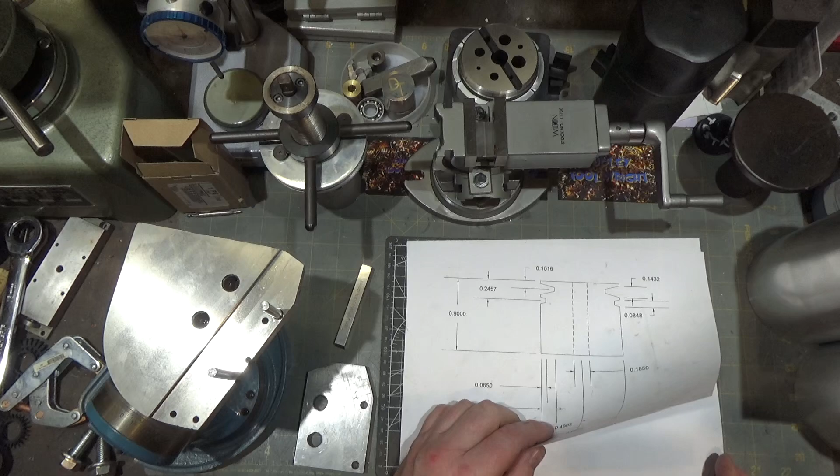So this time around I have some other parts. I got to make another part. He wants 5 of them for another customer. This is a blown up drawing and it's made out of Delrin. Everything's really simple except these 30-degree grooves. Walls have to be fairly accurate. And I'm not sure exactly how this fits, but it's part of a record player.

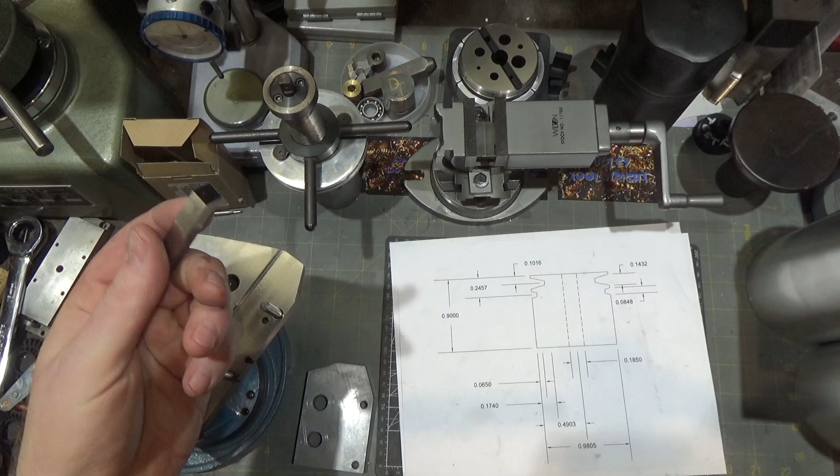This is a scale drawing, so this is a 1-to-1 drawing of the parts, so they're fairly small. But these grooves are fairly deep and fairly close together. 30-degree walls. So what I'm going to do is grind a 30-degree tool. I've got some high-speed steel here, and I have not got a ton of experience grinding bits, and I'm not going to try and freehand this.

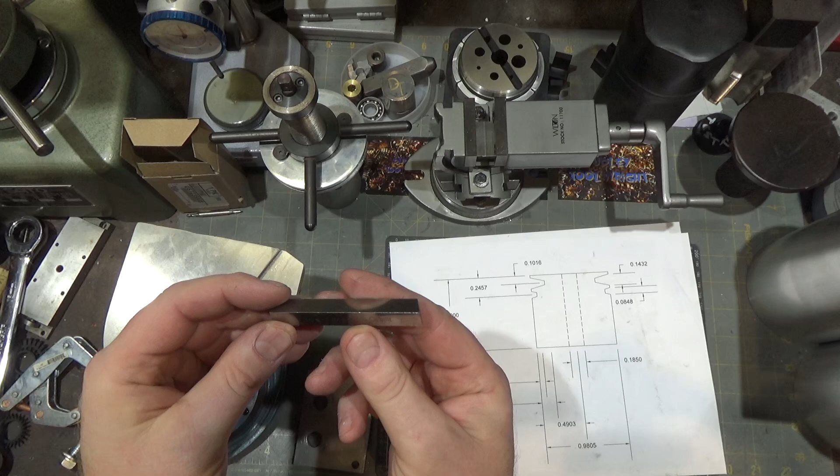Now the nice part is that this bit's already got a slope on the front here that slopes back away from a point, so that saves me one of my grind angles. So let me just give my 2 cents for someone who's very inexperienced about grinding tools. But the general theory is that if you were just going to cut on, say, this far edge over here, you want the tool to fall away in every single direction from that point.

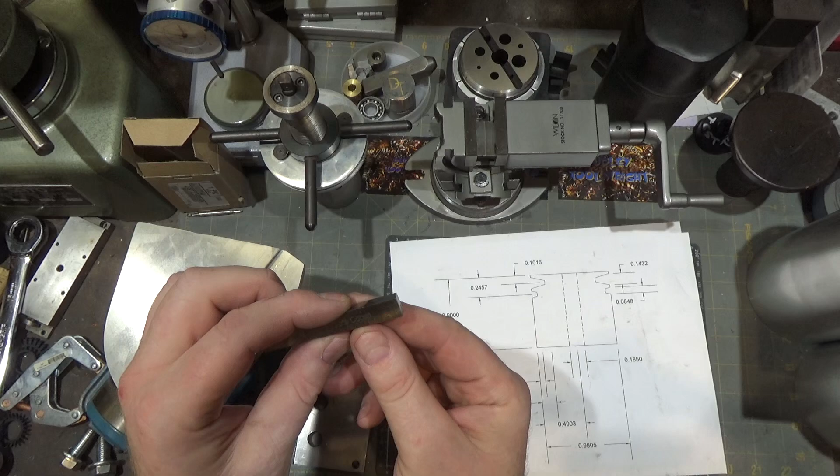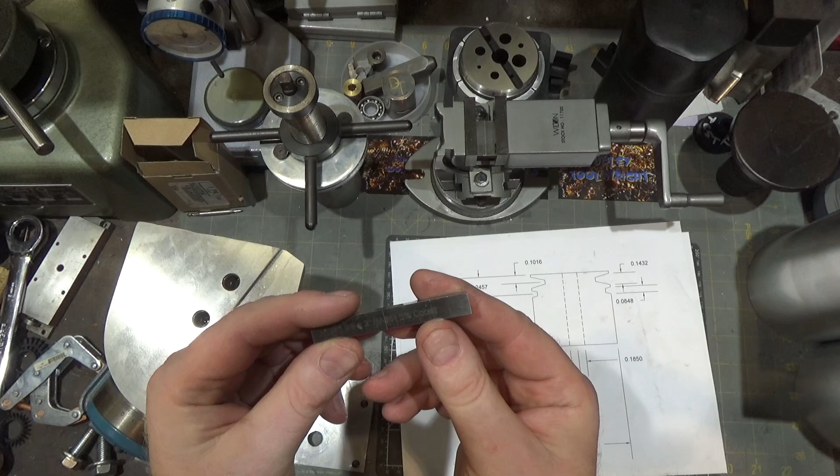Means you want this plane here to slope back. You'd want the top to slope down. You'd want this to slope away back to the side. You'd want this to slope down the way it is right now, and you'd want this corner to slope back like this. You know, this angle. Basically, you want the tool to fall away from the edge at every possible angle. And that would be a normal approach.

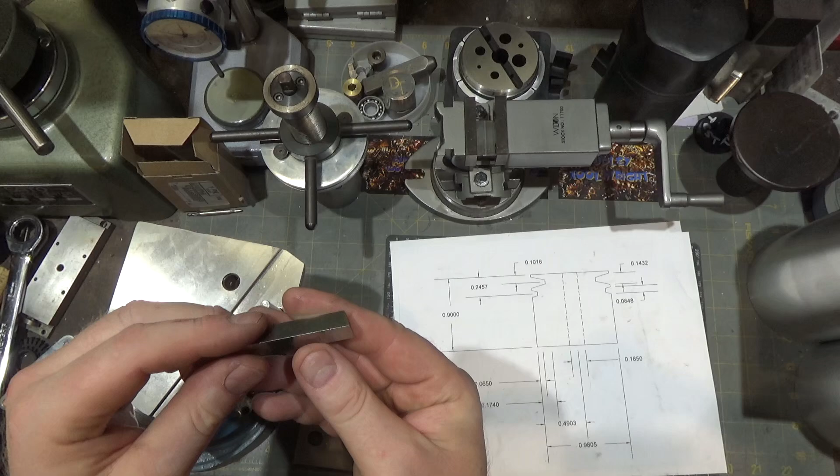However, this tool is going to be a 30-degree cutting tool, and so what I'm going to do is I am going to use this angle as relief on that direction, and I am going to grind this side down 30 degrees, this side down 30 degrees, and then I'm going to take the top and put a relief this way on it so that the chips have somewhere to curl. We'll see how successful I am.

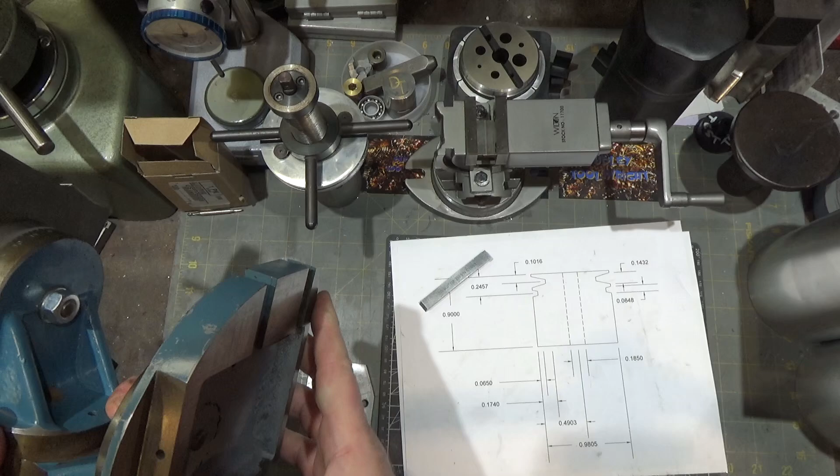I got this guy on eBay, and when I got it, this was all painted, and I took it to my surface grinder and ground 2 sides square to each other so that I have a reference point, and I set this at 90 right off the bat so that I'd have somewhere to go from. And then I surface ground the top. These holes were all in here except for these 2 pins. I don't know, there's some sort of weird thing that went on here.

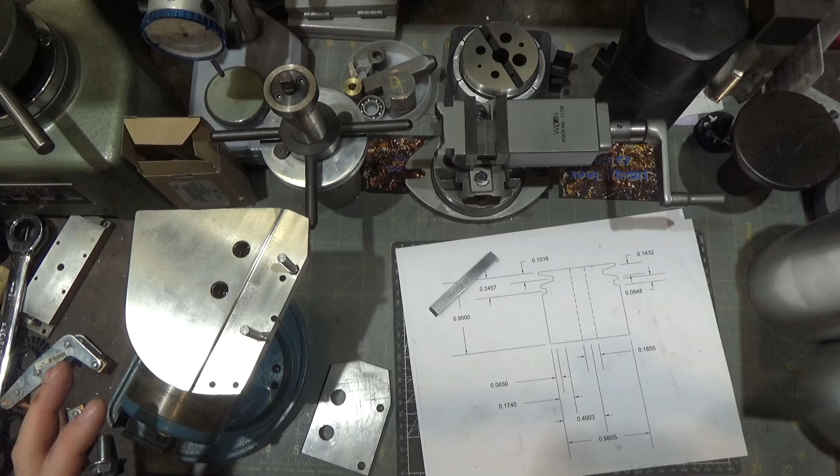And interestingly enough, when this thing's all set to 0 with everything set to 0, this was at quite an angle on here. So some sort of specialized thing. So I squared this up again, first with the mill and then on the surface grinder. So this is all nice and square. Parallel, this is parallel to these 2 edges here, so when I set up my surface grinder to grind this tool, it should be good.

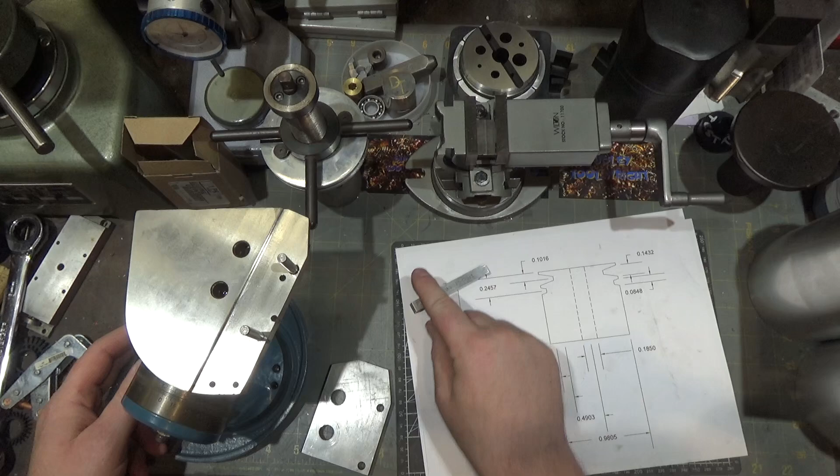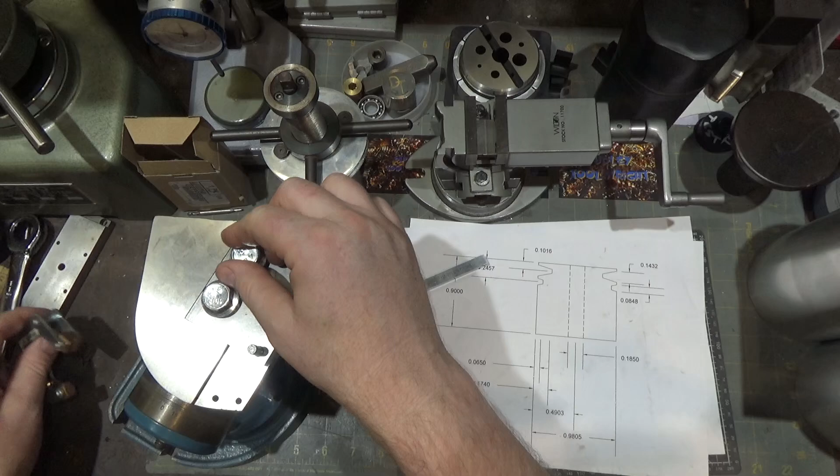I added these 2 pins because I don't really have a fixture to hold anything down here, and this goes down, slides down. This was to prevent it from tilting too much. It doesn't completely prevent it, but it does an okay job. So 2 bolts go in here, and you tighten them down. So in the meantime, I'm taking a Kant-Twist to tighten this side down at the same time.

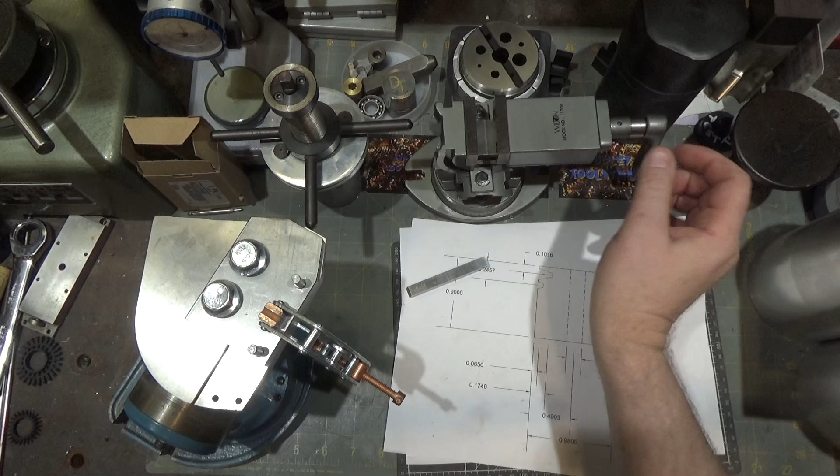I know you'll see in the background here this Wilton vise. This is a multi-angle Wilton vise that I just got. I still need to build a base plate for it, and I didn't think I'd have it in time to do this. So the quality is okay, not great, certainly not equivalent to what you expect when you pay the Wilton price. Although this wasn't terribly expensive, but it's a really small vise.

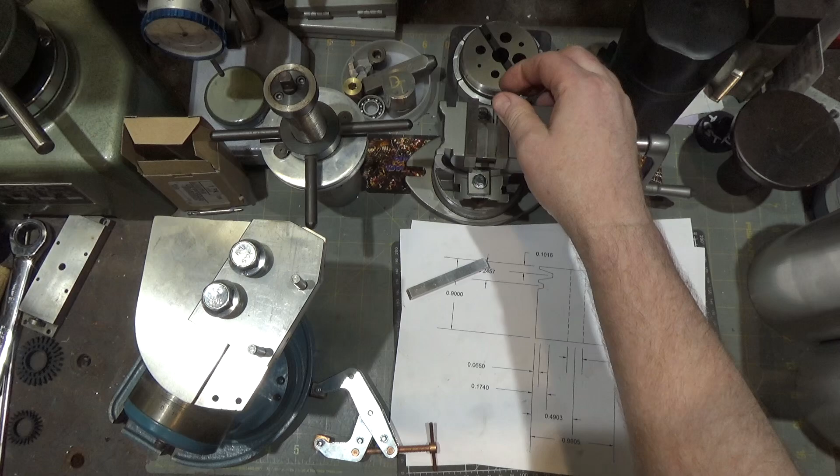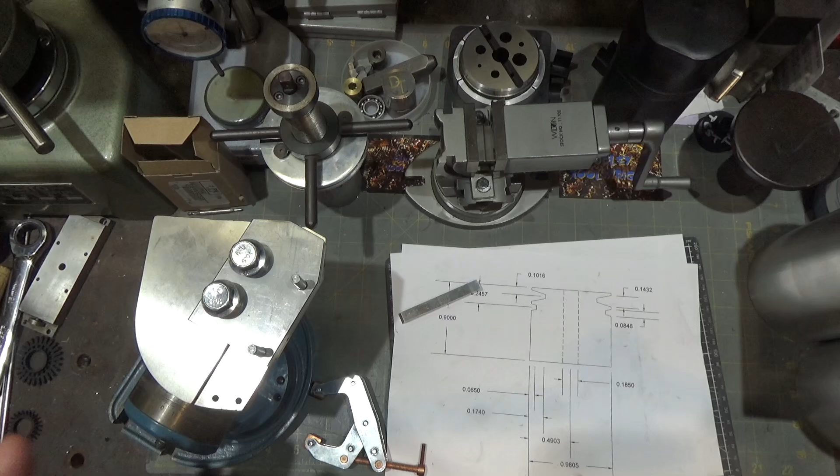These are 2-inch jaws, but they didn't even bother deburring where they ground these edges here, which is really strange. You expect more out of Wilton because, again, they're supposedly the big name, you pay the high price for them. So a little disappointed in that. The action of the jaws is smooth, so I'll use this maybe for the next tool bit I grind. But in the meantime, we're going to take this guy over to the surface grinder and grind this bit.

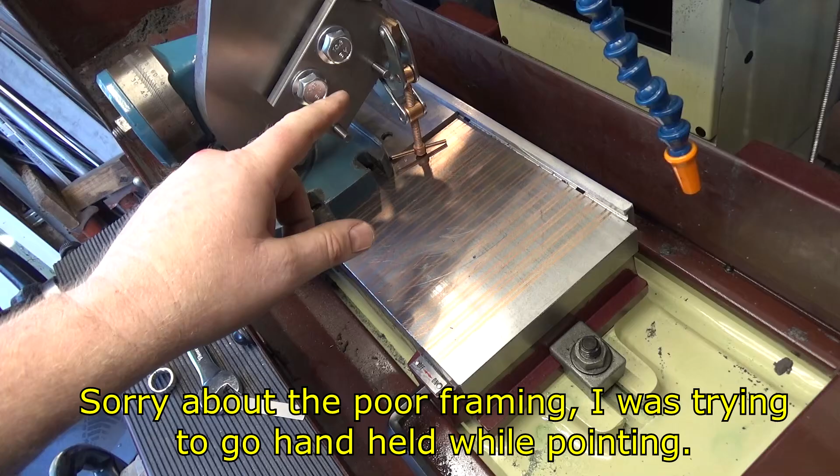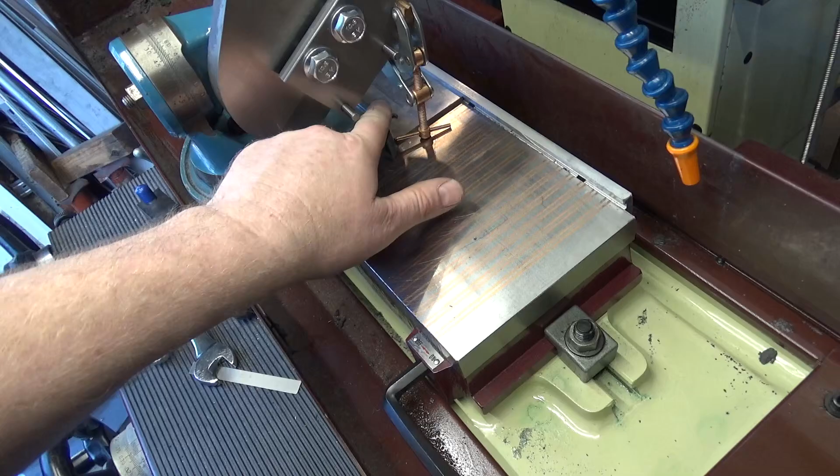Alrighty, so here we are with the surface grinder, and I've got myself set up here. And this clamp is just to make sure that this piece is held in here nice and tight because these 2 tend to cant this a little bit. I've got 2 parallels off the back fence that's square to the table, and then I've got the reference surface on the front of the vise. This guy is set to 0 degrees over here.

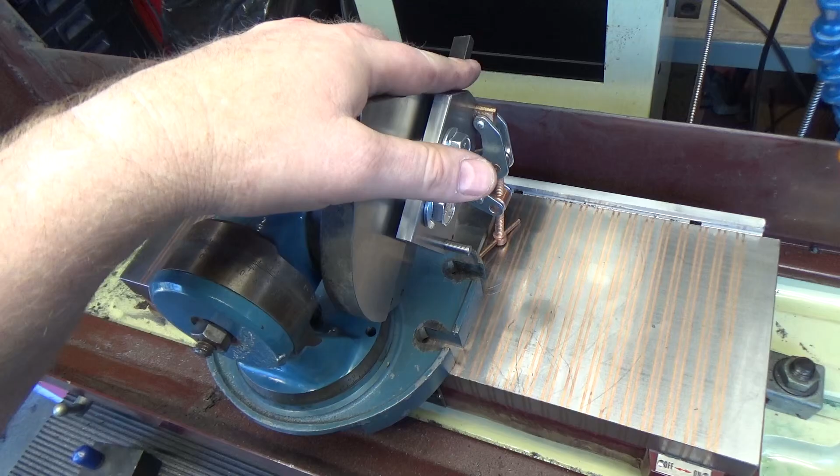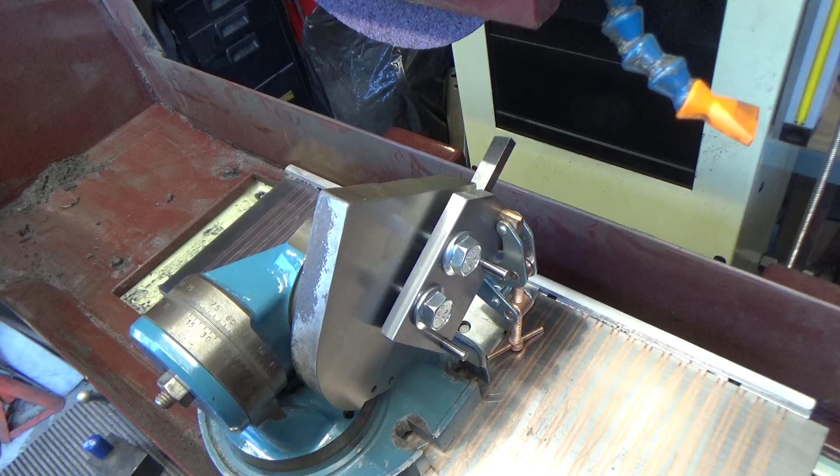Now I've got this one set to 30 degrees, which is going to give me my 30-degree taper there. And then I also have it tilted slightly this way by about 5 degrees to give me some relief along the side so that it falls away from the cutting point. So we're just going to take some material off and see how we do. Alright, so we're just touching off here.

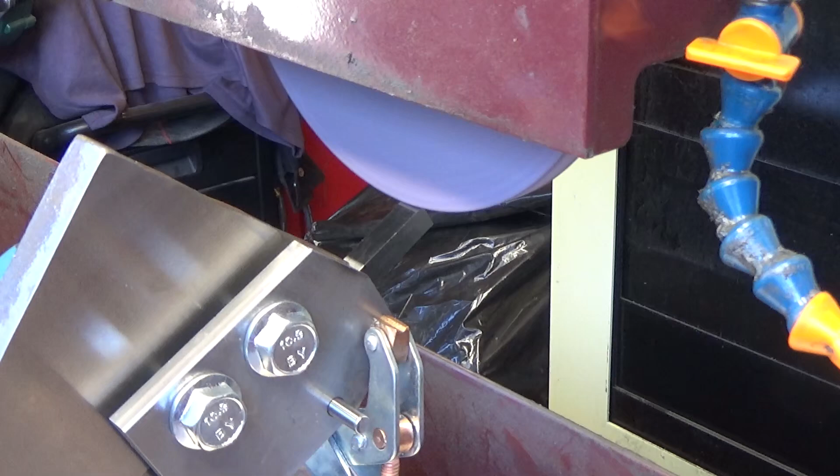Oops. This new camera holder I've got is going to work out, but we'll see. I hope you can hear me. This is a cobalt bit, so I'm going to wear a mask because you don't want to breathe cobalt.

Probably would have been easier to take off the majority of material on the normal grinder and then come over here and finish it off. But I wanted to try this out.

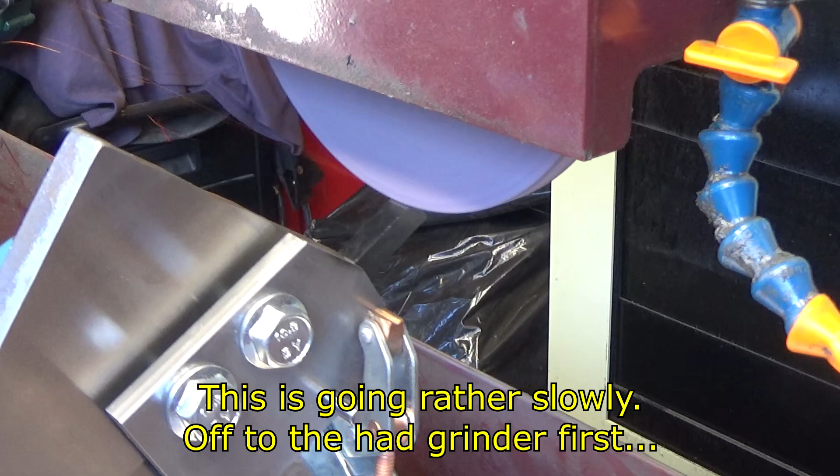I went back and took most of the material off at the grinder, and then I realized I had done 30 degrees, but what I really needed was 15 degrees. I need half angle. So I got to take 15 degrees on each side. So that'll leave me a final angle of 30 degrees. So I took off most of the material. By hand.

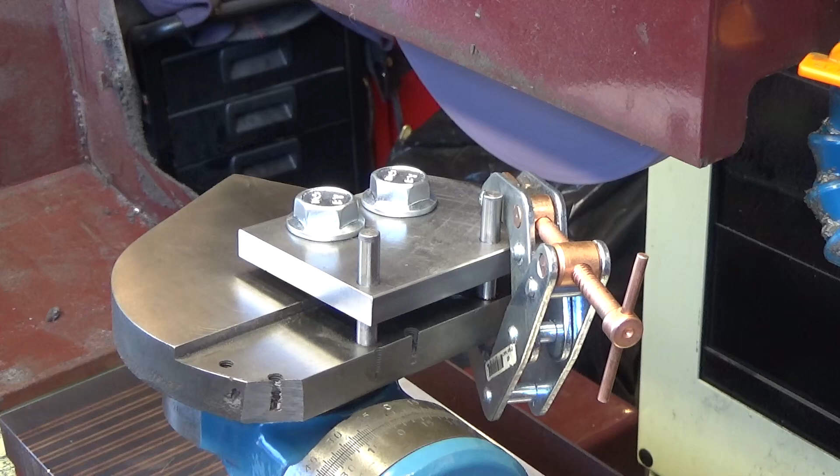I don't think you can see this when we pull this out a little bit. So we're going to do the back relief on the cutter on the top now. So we're going to touch off a little over ½ inch back, which is where we want to have the cutter start.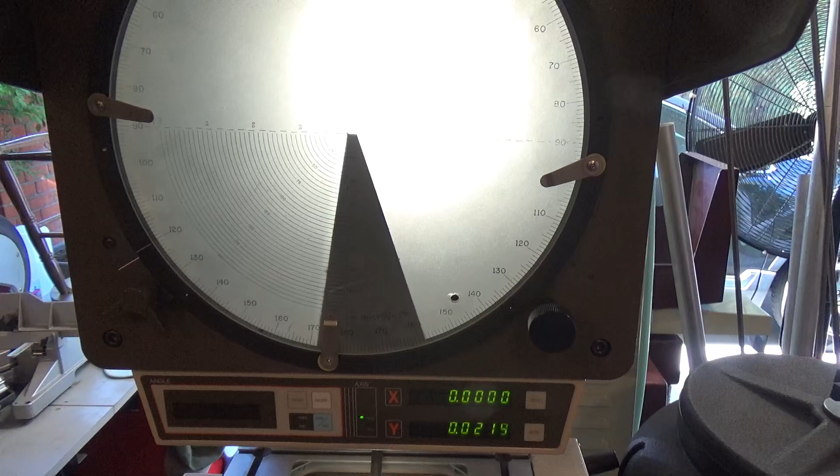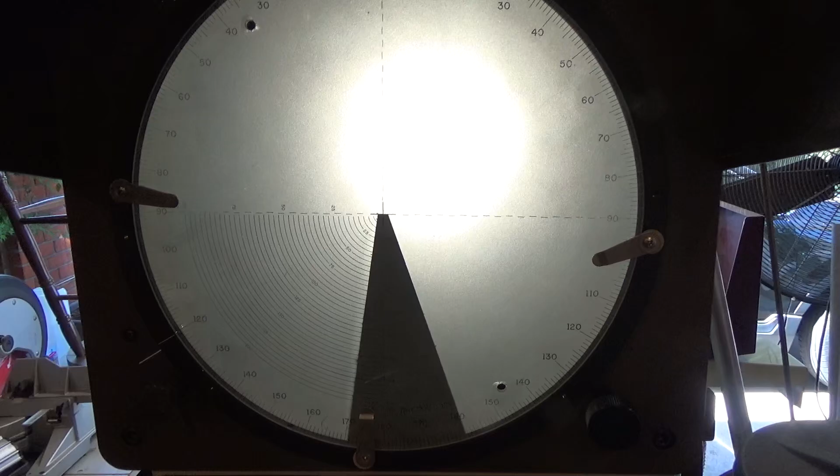Alrighty, so I got my tool bit on the optical comparator, and you can see that I made the end square. I didn't bring it to a perfect point, and I was wondering how wide that is, just to make sure I didn't have to go back and regrind. So if you take one edge and set it over, hit your 0 over here, and then move until the cross is on the other end there, it's about 22 thousandths, 21.5 thousandths across.

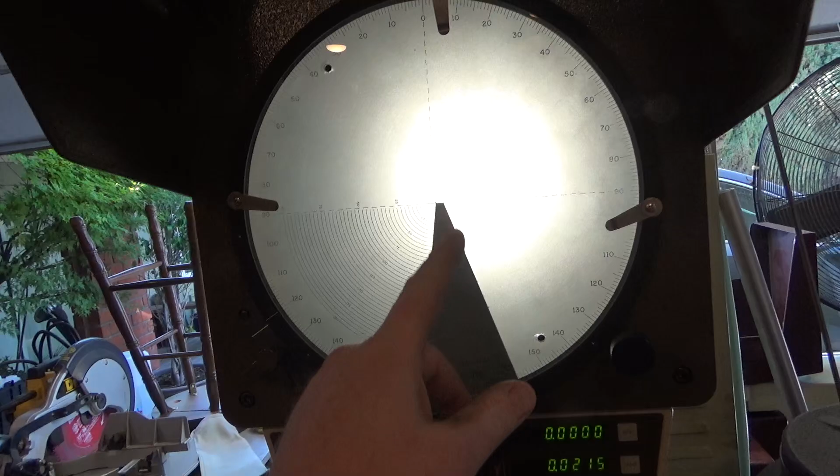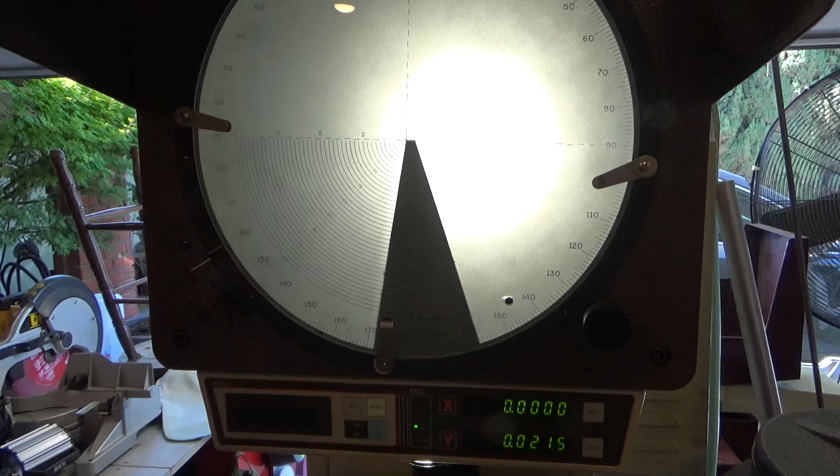And then I'm going to use this to measure the angle. It doesn't have the digital angle measurement option, but I can use the scale on the glass, and when I measured it's 31 degrees. So I think that's close enough for what we're doing here, and we are going to go over and try and make the parts.

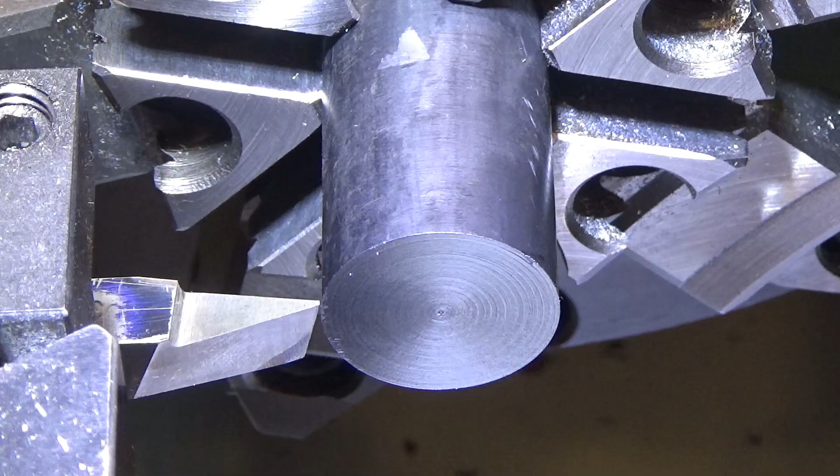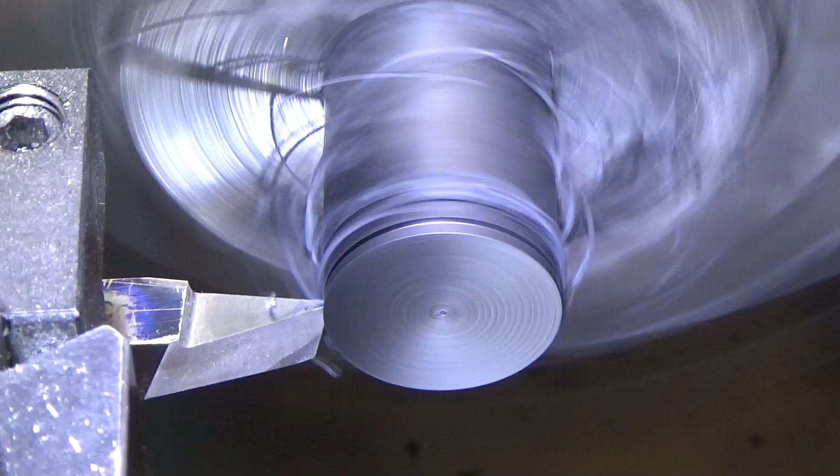So let's do a test cut with the new tool, see how she works. So the farthest we'll have to go in is under 200 thousandths. This is essentially a form tool, so let's see, that's 50 thousandths. That's 120. So far, so good. It's 150. Okay, and then I need to go over 30 thousandths, well, 28 thousandths.

Okay, that worked like a charm. Better than I expected. Second tool I've ever done, but first form tool. And so we got 30 degrees. The side needs to be deburred, but I'm really impressed with how that turned out. Let me part this guy off, and we'll try and actually make the part.

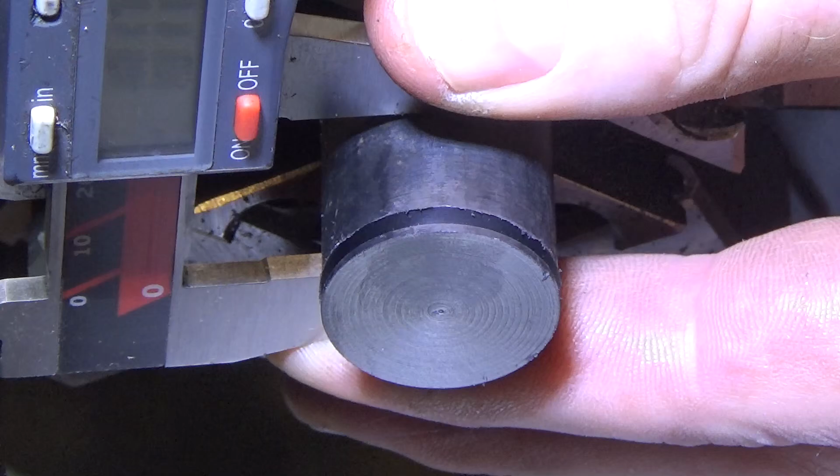The diameter has to be reduced from its current diameter, which should be around an inch. This should be nominally an inch. Let's see. .011, we've got to take it down 30 thousandths. But let me just part this guy off. And this Delrin just cuts like a dream. It's pretty fantastic stuff to work with. We'll just part it off right next to that.

Normally with the parting tool you don't get a great finish. With this material, the parting tool leaves a pretty nice finish. That's what you're looking at there. Even at this speed. That's a pretty nice finish, huh?

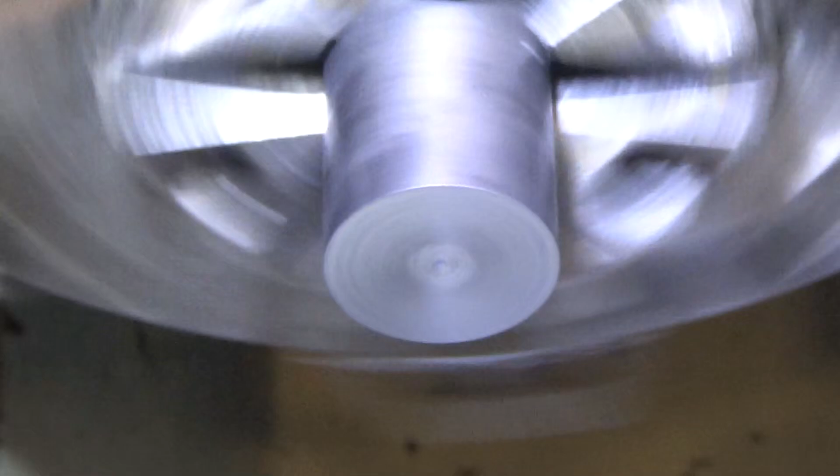All right, so we got to take the diameter down. I'm going to get a mic so we can take a look at that. We're going to take a first pass. We're going to try and leave about 10 thousandths. I do need to slow the feed rate down because that's not the perfect finish we want. So I slowed the feed rate down quite a bit. And we're only taking off 4 thousandths this pass.

This might not be ideal. A lot of times with these inserts, it's better if you take a bigger bite. Small bites sometimes don't work out so great. All right. Finish is decent, not perfect. I have seen better with Delrin. I think bigger bites. This really tiny bite, 4 thousandths of an inch, is not ideal.

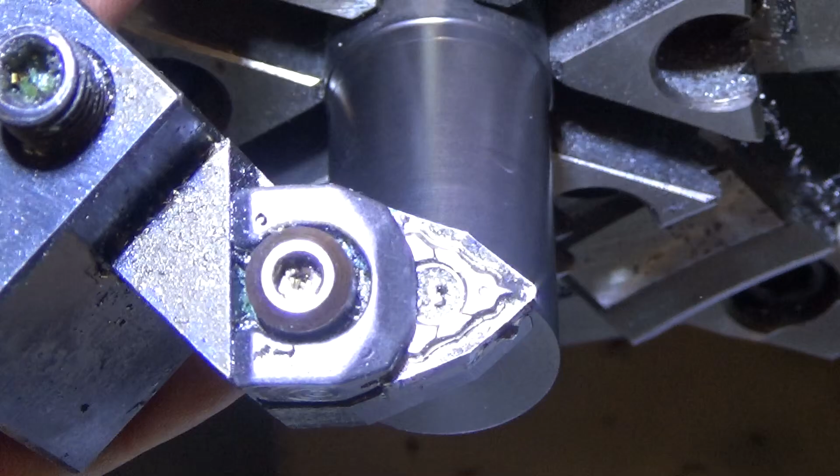Oh, and my insert. I should have rotated to a perfectly clean edge on the insert. The insert's not great either. So these are positive rake inserts. You can see they've got a coating on them to make them very shiny, but you can see the edge where I've been cutting aluminum with it has probably got a little bit of aluminum adhesion, even though the coating's supposed to prevent it. So I could have gotten a better finish if I had flipped the insert around.

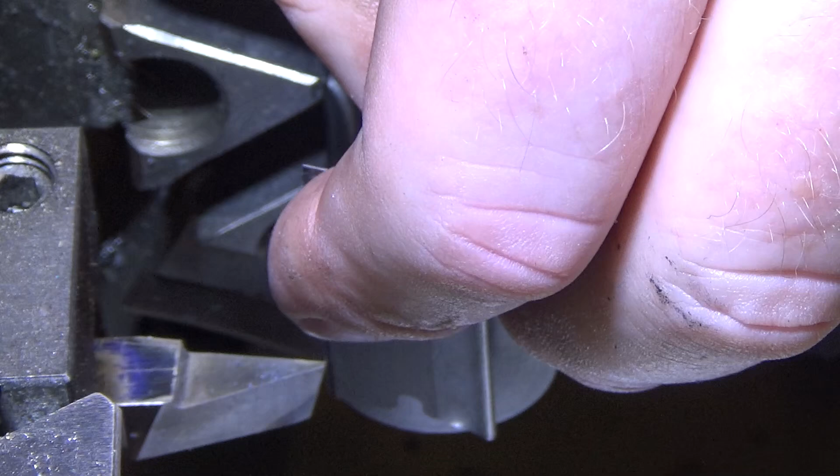Alrighty, but this will be the first part. Let's just see if we can get this guy here. So the end is 22 thousandths wide, so I'm just going to find my 0 here. There's my X0, and I'm going to pull back just a touch. So I'm going to try and find the right edge of this guy, and the way I'm going to do that is I'm going to use a Pajcinski method, which is to use a razor blade. Let's see when I can just grab it.

We're going to call that 0. So since this is 22 thousandths wide, what I want is the center line of this. So we're going to come back 11. That makes the center of the cutter right along the edge now.

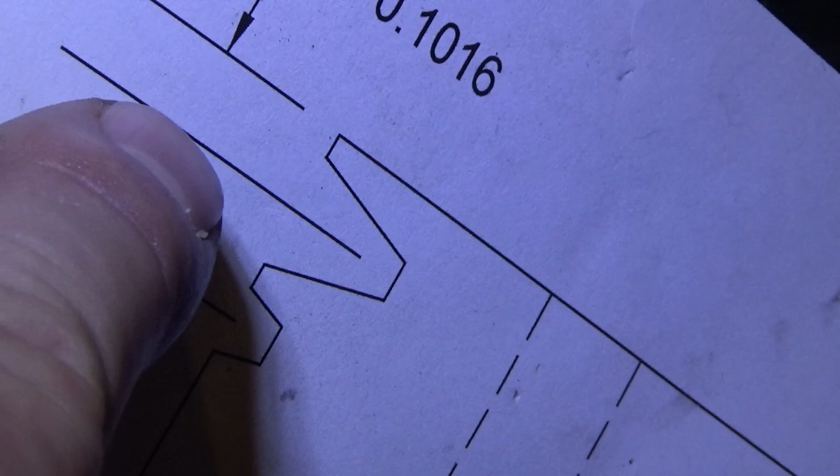So the first groove, the center, which when I redid the drawing, let's see if you can see this. When I redid the drawing, I based everything on the center of the groove. So the width of the grooves are 50 thousandths, and the spacing's 50 thousandths. If I remember right, I'm going to have to go double check that. If I remember right, the center of this groove is 101 thousandths over, and call it 102. And I think the width is 50 thousandths on both of these for the base, but I got to go double check that. I didn't get that on this redone drawing.

Alrighty. The bottom of the groove is 50 thousandths. The width of the cutter is 22 thousandths. I've created a separate 0 reference for the middle of this part. And what we're doing is we're going plus or minus 14 thousandths either side. So to get the cleanest edge, I'm going to plunge 14 thousandths on either side, and then I'll sweep across to do the bottom, just clean up the middle section.

So we are here, and we've got our 0, so we're going to go in to the final depth of 174. And I'm going to come back out and clear the chips. I'm going to go 14 thousandths on the other side. Should leave my bottom to be the final 50 and just plunge down. And that should be the first one.

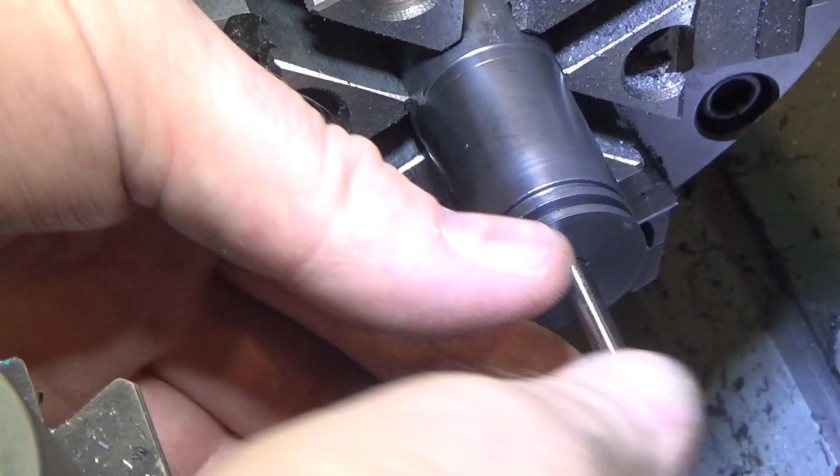That's drilling. And ordinarily reaming is a very low speed operation, but this drill bit was only 3 thousandths undersized for the ream hole, and I don't think it's going to matter because it's plastic. I might be wrong. That's it. There's the .185 pin. It's a piston fit. Now it's got a vacuum behind it and it doesn't want to come out. All right, so the hole size should be good.

I think this is going to be convenient because normally I would leave extra material, turn around and reface the part, but this is cutting so cleanly. I'm just going to try and part it off and use it as is. We're going to get it to exact size. So final dimension, I've got the edge of the parting tool right on this edge here.

And I didn't use the same method, the razor blade method, just used a different one. Basically got this side on a piece of shim stock, just let it slightly grab, go over 21 thousandths for the thickness of the shim stock, then go over 77.5 thousandths for the thickness of the cutter. And the final length is supposed to be 0.9 even. We're gonna leave it just a tiny bit large. And as long as I'm here, just going to touch deburr that edge.

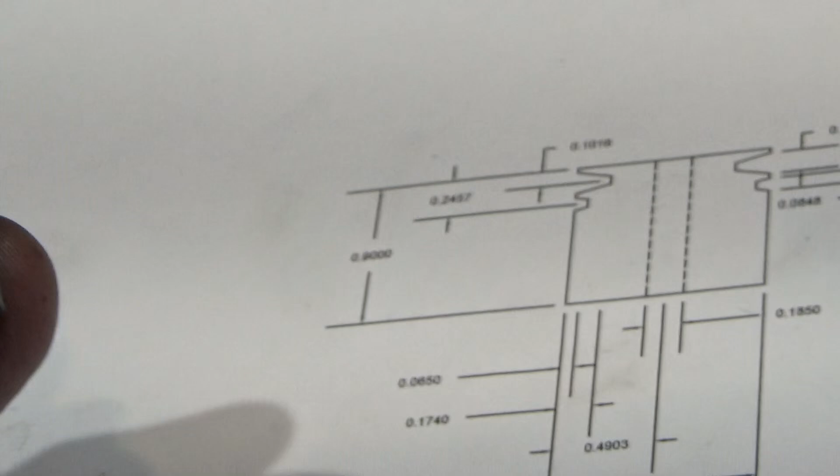And we are good. So this part turned out great except for one minor problem. If you can see on this drawing, I've got depths here 0.065 and 0.174 and the radial distances, and I forgot that my DRO measures in diameter, so I've actually got to double those numbers. So these depths are half, and when I put this on the one-to-one drawing, I could tell that they weren't going as deep. So we're heading back in, we're making another part.

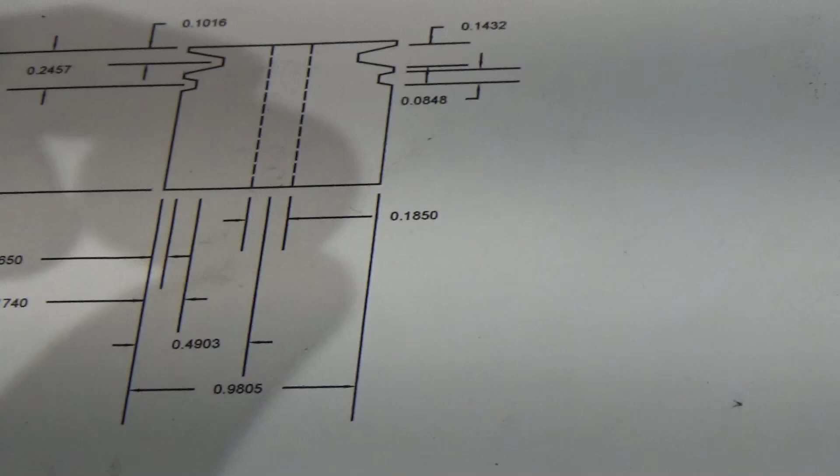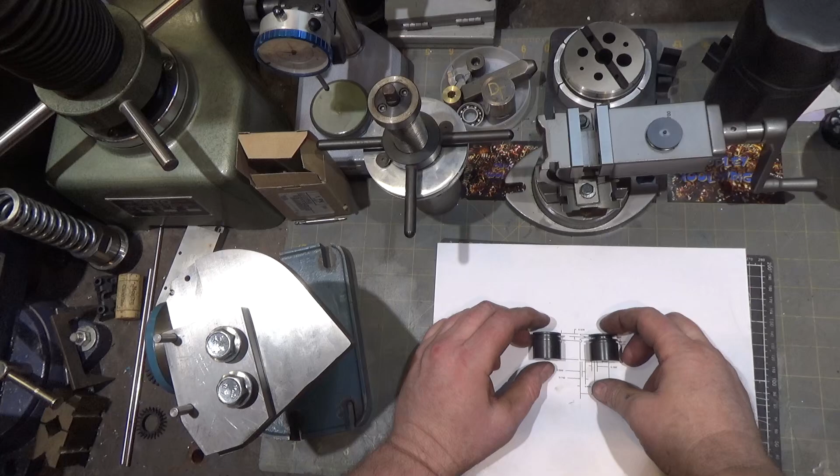I can actually re-groove these, but I got to change chucks to have a different chuck to hold this and still work on it. So I'm just making another part because it's pretty fast, and I'll be right back. Alrighty, so here's the two parts I made and the test piece I made just to see if the cutter worked, which it does. The first one, I only went half depth because the measurements I have here are radial and the DRO was measuring diametral. So I went and remade it and now it lines up much better. Everything is looking really good.

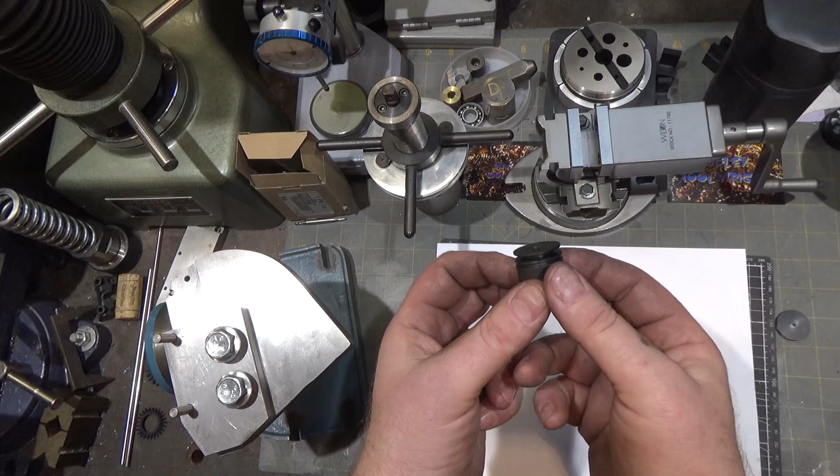So there's the final part, and it's for a record player, and I'm not sure quite where, but the customer said he may want 4 or 5 more if this one works out. So we'll see.